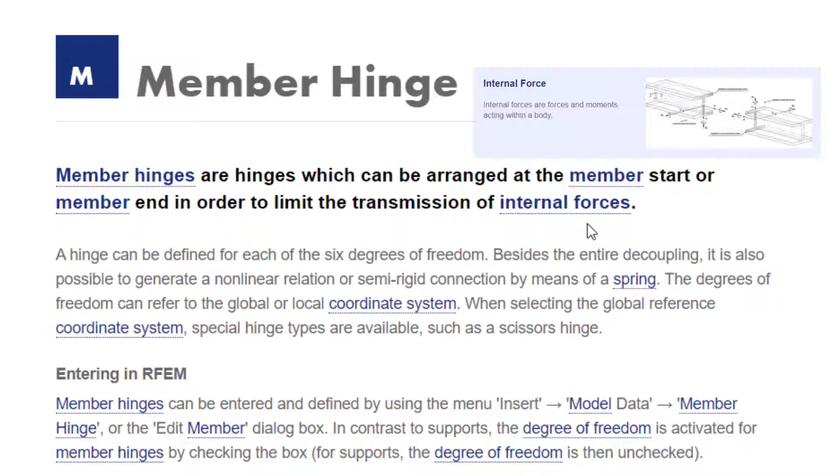Let's say you have a frame structure like this and you don't want the moments to be transferred through the entire structure. So you're going to want to add hinges to each of these members on both sides for the ones in the middle and only on this side for the ones on the edge. I'm going to show you different methods to do this.

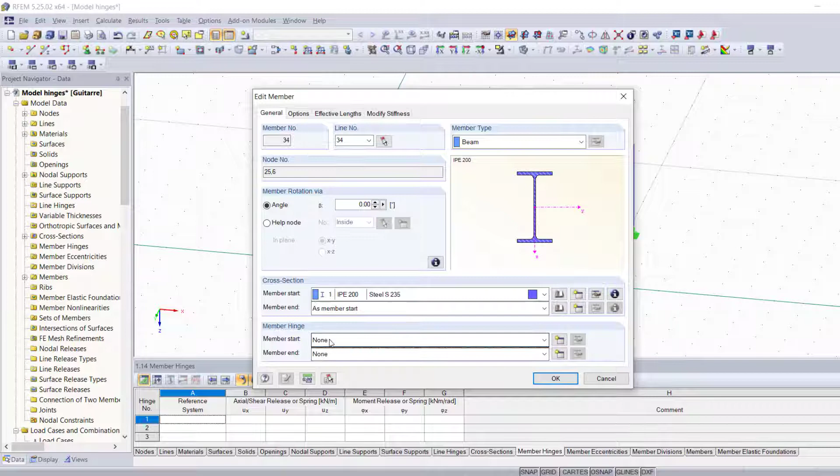The first one, which is probably the easiest and simplest way to add a hinge to any member in your structure, is double clicking on it and changing its properties so that it has a hinge at one of its ends. Now before I do that, I want you guys to look at this red arrow right here and memorize the member orientation, because it tells you that this member starts from the left side and ends at the right side. Now when I double click, you're going to notice that for the member start you have this field right here and you have one for the member end as well.

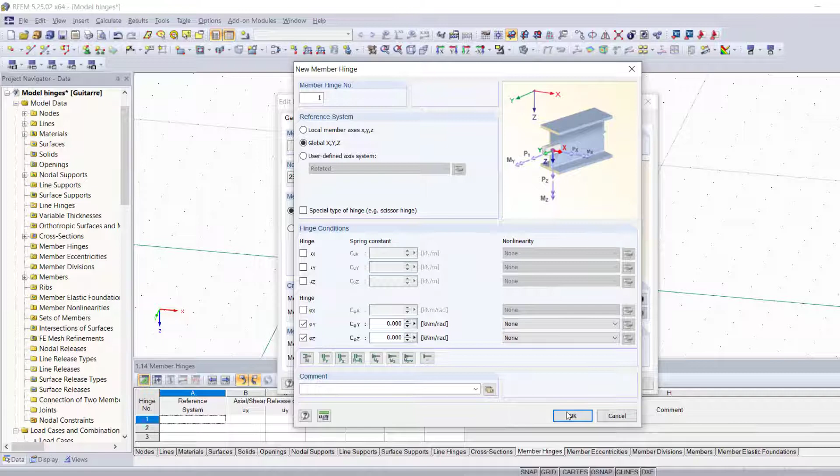So I'm going to go ahead and create a new hinge for the member start. We're going to define it according to the global coordinate system, and we're going to activate these degrees of freedom, which just happen to be activated by default because it's the most common type of hinges used in RFEM. We're going to activate the degrees of freedom, the rotation around the y-axis and the rotation around the z-axis. And we're going to go ahead and click on OK, which immediately adds this new type of hinge to our list. Now that we added it to the member start, we can simply choose it for the member end.

And we validate by clicking on OK. And now you notice these white circles right here that indicate that we now have successfully added a hinge on both sides of our member.

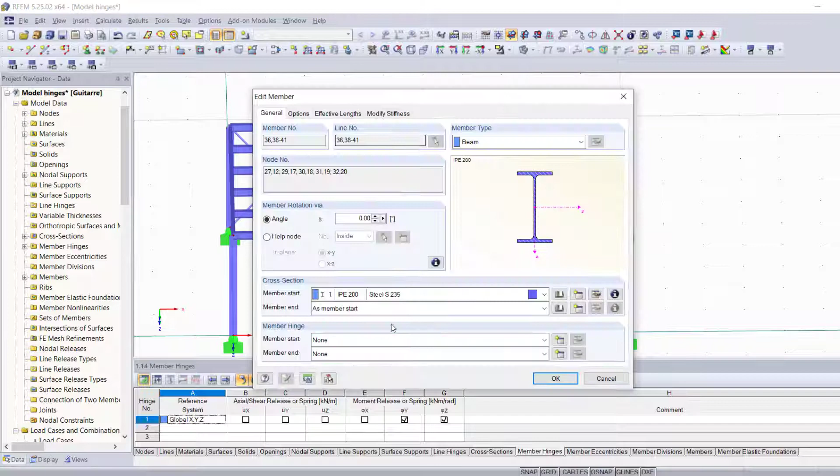Now before I show you the second method, I just want you guys to know that in RFEM you can select more than one member. And when you double click and edit this kind of properties, it actually changes the properties for all the members that you've selected. And now you see that we have hinges on both sides of each one of these parallel members.

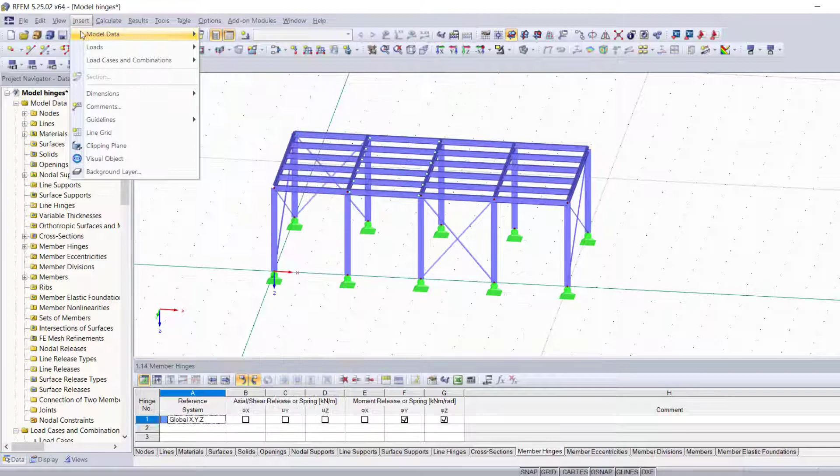Now the second method is one that I personally like a lot, because it's very useful when it comes to adding hinges to different members located in different spots in your structure. That is inserting the member hinge graphically. We're going to go ahead and click on Insert, Model Data, Member Hinge, and select Assign to Members graphically. The first major step of this method is choosing the type of member hinge that you want to assign graphically to your members. We're going to go ahead and choose the same type and hit OK.

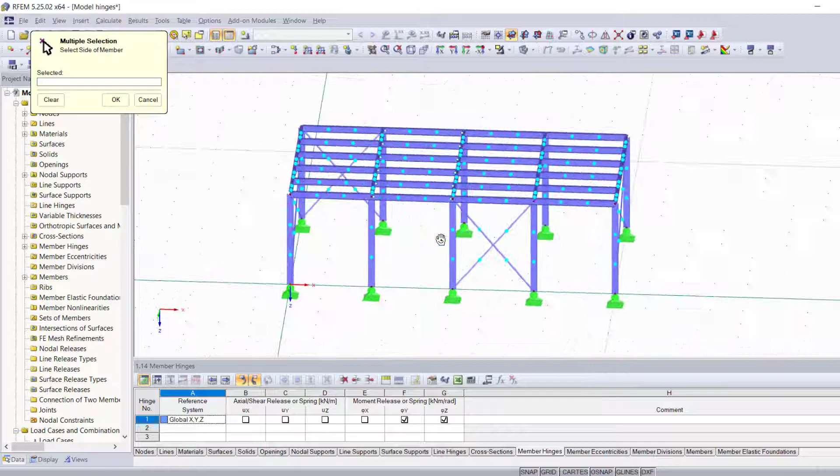Now when you do that, you realize what RFEM basically does with these blue dots right here is divide each and every member of your structure into three parts. Now let's take this member right here as an example. When I hover over this member, you're going to notice that the selection suggested by RFEM depends on the location of the cursor and which one of these three parts the cursor is actually on, which basically means I can graphically choose where to assign my hinges.

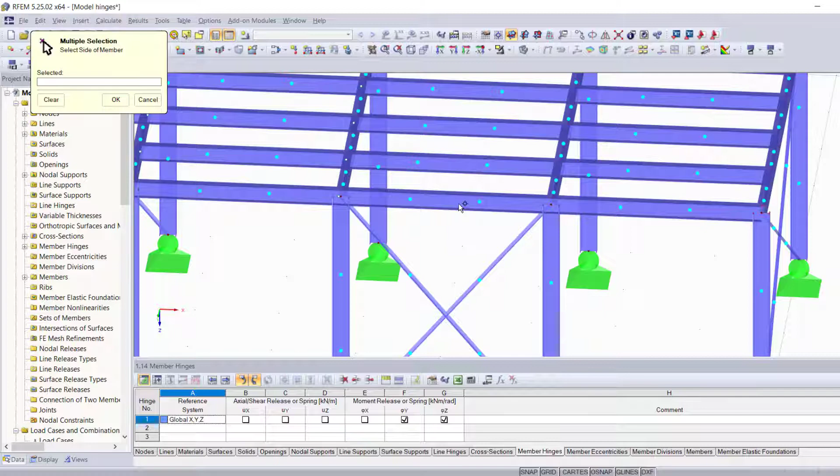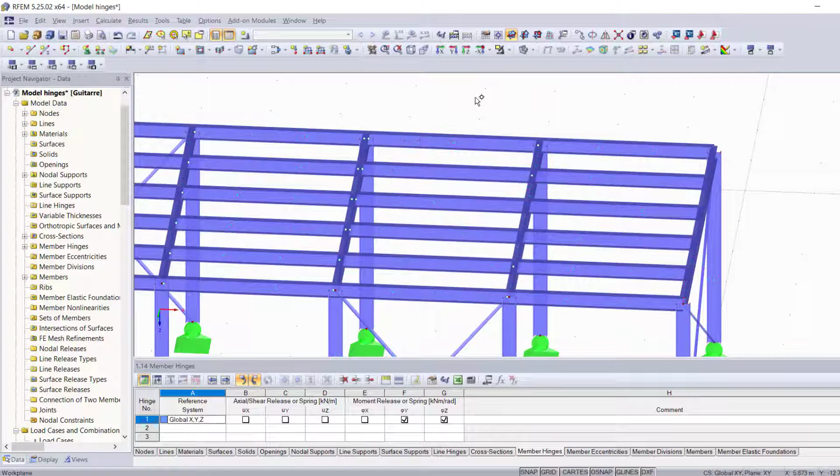Let's say I want to add single hinges on the right side for these two members and on the left side for the next two, and just to try things out on both sides for these last two members. And I'm going to go ahead and hit enter to confirm. Now what you see happen here is we have hinges only on this side for these two members, on this side for these two, and on both sides for these last two members.

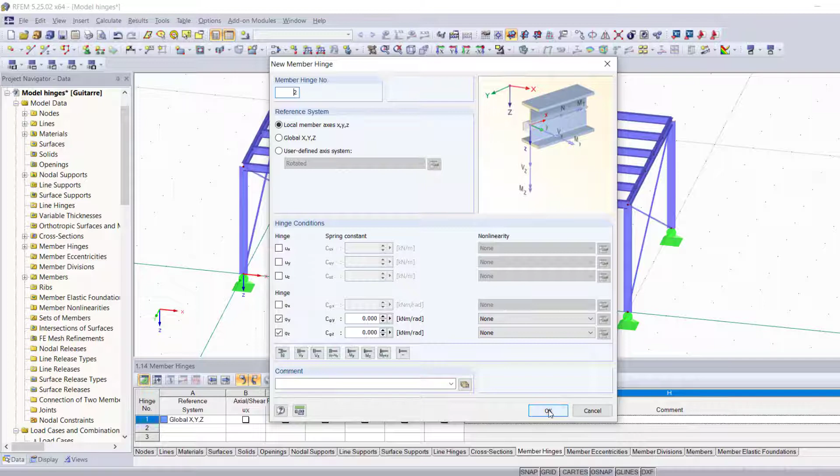The other two methods that I'm going to show you are defining the member hinge through the dialog box before assigning it to any member, which makes it appear as a line here at the table. And then you're going to be able to find it in the list of member hinges when you select a member.

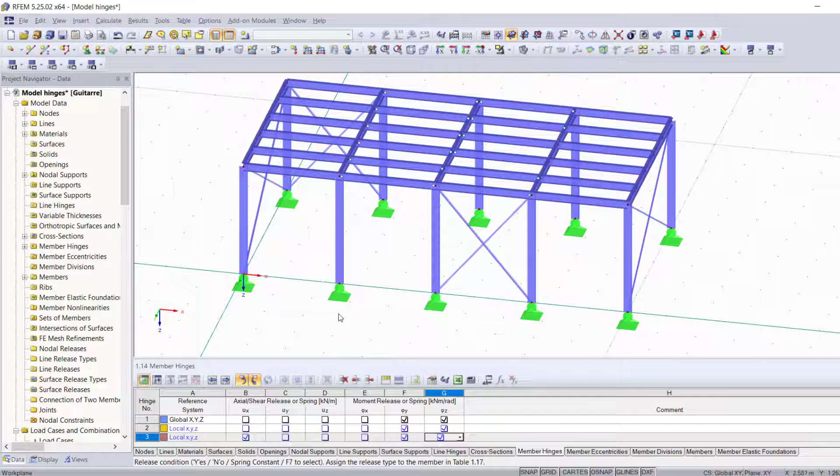And the last method would be adding it through the table, which basically means you're going to have to change your hinges properties manually until you get the type of hinge you want. And then of course you're going to be able to assign it in any way you want. You can also assign it graphically. Let's choose the type number 3, and as you can see, you can always choose that type of hinge for any members in your structure.